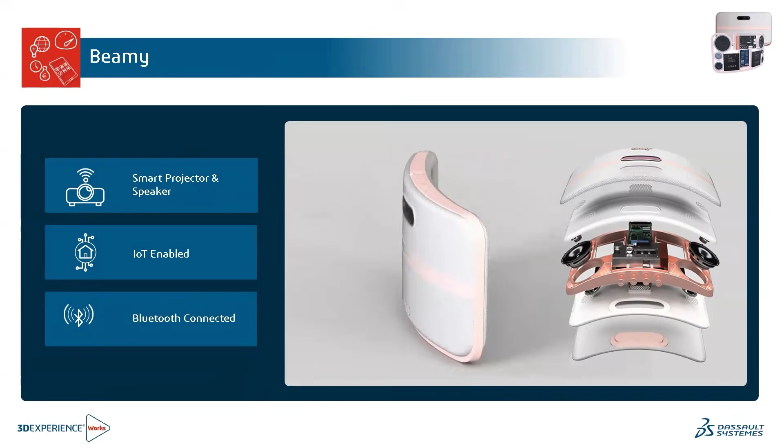Now, to understand how unified modeling and simulation or ModSim can help address these challenges, we're going to take a look at the example of Beamy. Beamy is a smart projector and a speaker. As it is IoT enabled, it can be connected to other devices like smartphone, smart TV, or other smart home appliances. And it primarily consists of an acrylic frame, projector unit, electronic speakers, and batteries.

Now, some of the key performance requirements for typical high-tech devices are: first, it has to be smart and connected. So in case of Beamy, we need to ensure that the Bluetooth antenna is placed at an optimal location for uninterrupted communication, the PCB can transfer high-speed data efficiently, and the device is ready to go through EMI and EMC compliance.

Secondly, as you can see here, there are a lot of small components packed in a tight enclosure, so they can heat up pretty quickly. So we have to ensure that the maximum temperature of these components is within the operating limits. This will ensure that the device operates efficiently and does not overheat, ultimately extending its lifespan and improving overall performance.

Third, the device must be robust enough to withstand any accidental drops or unintended abuse scenarios without compromising its functional or structural integrity. And lastly, the casing is made up of injection molded plastic parts, and we need to identify if there are any potential defects that might occur in the manufacturing process. This will eliminate any expensive and time consuming mold rework later in the production phase.

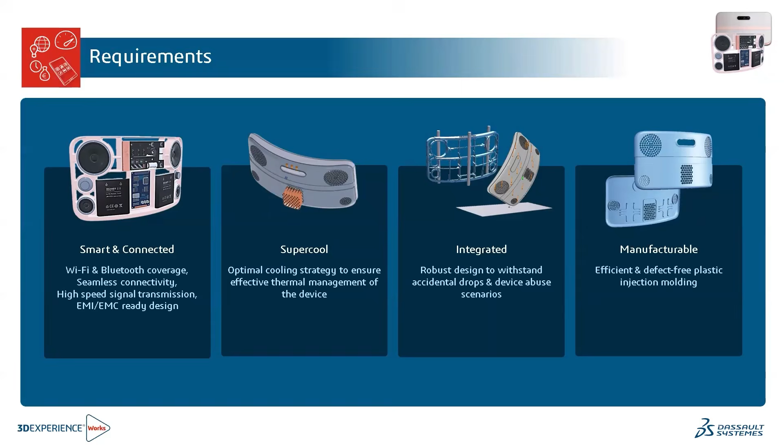So let's talk about ModSim now. But before that, I just quickly want to talk about 3D Experience Works, which is our on-cloud 3D Experience portfolio for SolidWorks customers. Now with 3D Experience Works, you are getting the best of both worlds, meaning that you can use SolidWorks modeling capabilities to design a product, and for advanced multi-physics simulation, you can use the 3D Experience platform to validate the product.

And with the 3D Experience platform, it's not just simulation. The platform is a cloud-based, fully integrated end-to-end solution that brings all the disciplines and stakeholders together, from design, simulation, all the way to manufacturing, governance, marketing, and sales. And today we are going to focus on the synergy between modeling with SolidWorks and simulation with the 3D Experience platform on the cloud.

Now, as you can see here, the 3D Experience platform empowers SolidWorks users to run multi-physics simulations on the cloud across different disciplines, such as structures, fluids, electromagnetics, plastics injection, and even rigid body motion.

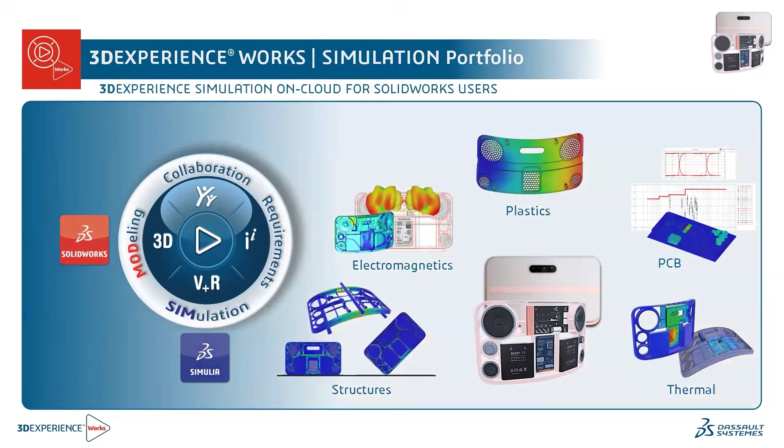So what is ModSim? Traditionally in many companies, design and simulation teams are working in silos, meaning once the design is complete, the designer will throw CAD over the wall to the simulation engineer. And if there is a design change, there is a lot of import and export of CAD data between design and simulation teams. But with ModSim on the 3D Experience platform, we are modeling and simulating in a fully integrated collaborative environment without any loss of data or import or export of various file formats, as in the case of the siloed process or the traditional engineering process.

So let's see how we can use ModSim to assess the performance of Beamy. And as I mentioned earlier, the key requirements for Beamy are it has to be smart and connected, thermally efficient, robust design, and manufacturable plastic casing.

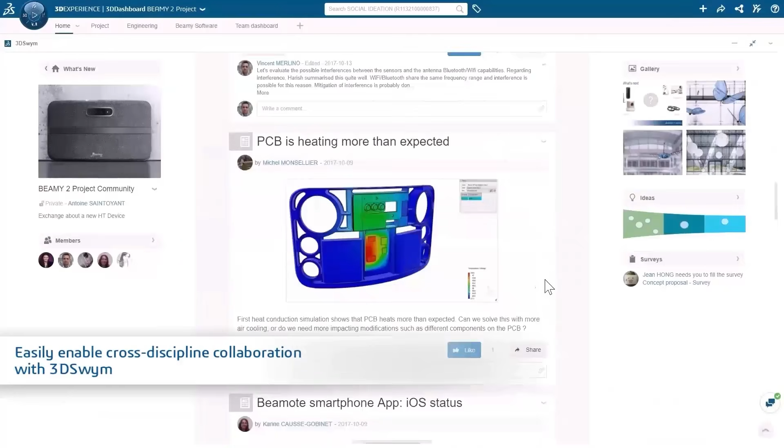Now, collaboration is a key aspect of the platform. And with the 3DEXPERIENCE platform, one can collaborate effectively. So as you can see here, we can create communities to share data with internal and external stakeholders. You can track the project status and also update the task that is assigned to you so that you can inform the appropriate stakeholders on the progress of the task.

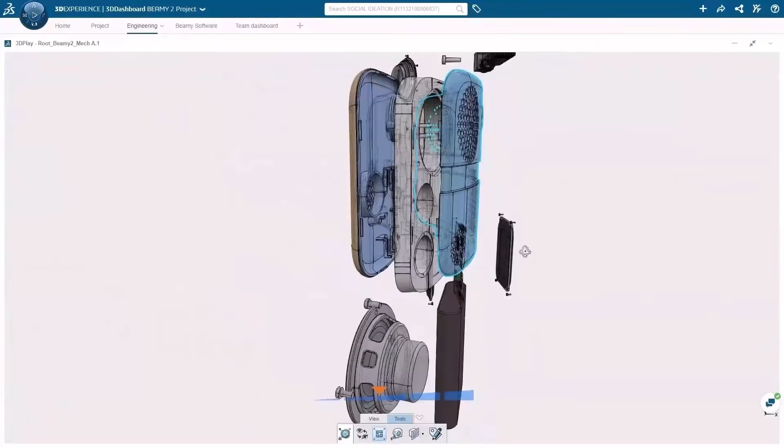And you can also review the 3D models in a lightweight visualization app without opening the native apps or the rich client. Now let's see how we can assess the multidisciplinary performance of Beamy in the 3DEXPERIENCE platform.

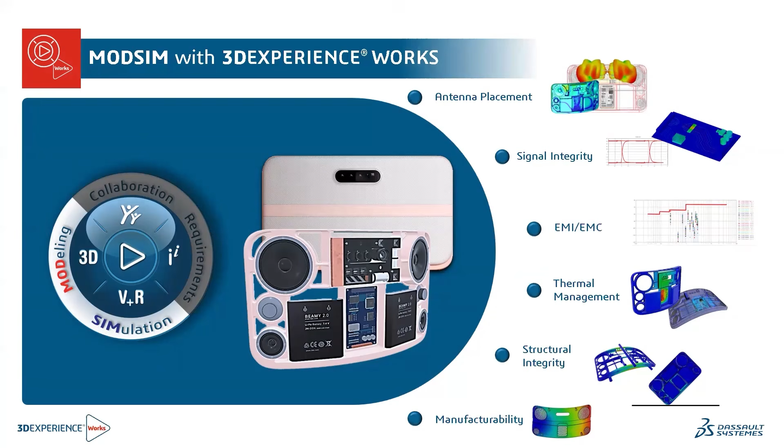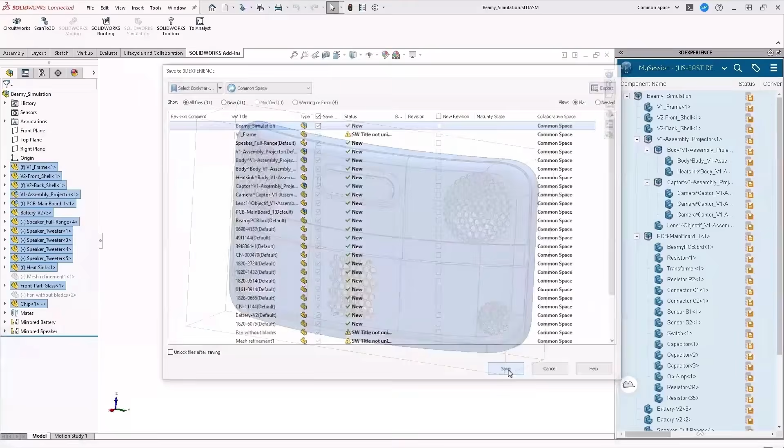Now the first and foremost step is to save the SolidWorks CAD onto the 3DEXPERIENCE platform. Now in this case here, we have the plugin or the add-in for the SolidWorks user. So within the SolidWorks interface, you can save the model on the platform. And once the model is saved, you can use the appropriate simulation role to set up the simulation. So here we are saving the model and we can quickly check the save status.

And once the model is fully saved on the platform, anybody can access this model from anywhere and on any device. And here we are launching the structural model creation app to set up the structural scenario on the platform. So as you can see from the SolidWorks interface, we seamlessly switched onto the platform to set up the structural simulation. So there was no import or export of CAD files or a dumb CAD to set up the simulation.

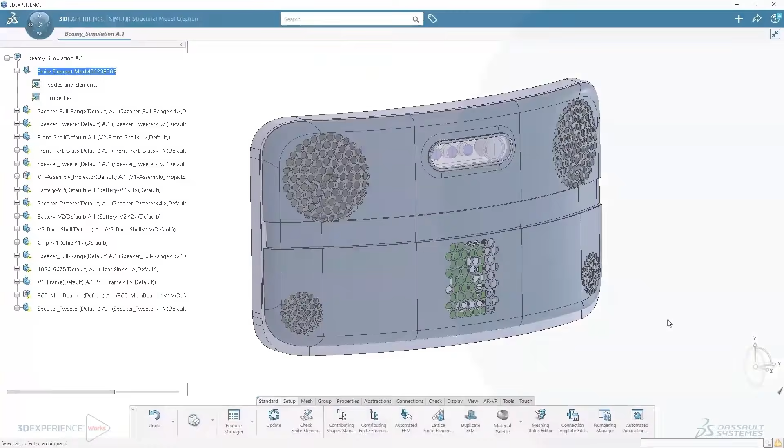Now let's see how we can assess the electromagnetic performance of Beamy. Now, one of the main challenges for electronic devices is that they need reliable connectivity in order to function properly. Without a strong and consistent connection, these devices may not be able to perform their intended task effectively. Now, one effective solution to this problem is optimal antenna placement. By placing the antenna at an optimal location, we can ensure that the device has the best coverage and signal strength, and it will provide a more stable and reliable connection.

Now, in case of Beamy, the KPIs are the scattering parameter or the S11 parameter should be less than minus 10 decibels, meaning that less than 10% of the signal is reflected and over 90% of the power is radiated or transmitted efficiently. Center frequency should be 2.45 gigahertz. So this is the standard Bluetooth operating frequency.

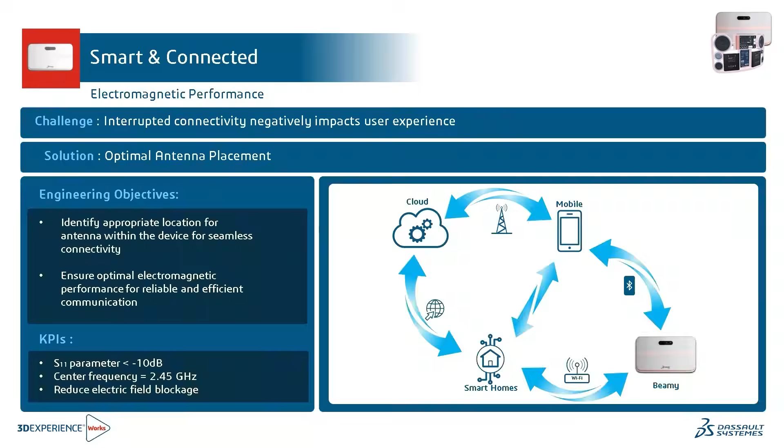And electrical field blockage should be minimal. So basically minimize any objects or material that could block the antenna's radiation path, as any obstruction causes reflection or absorption, leading to electromagnetic field distortion or localized hotspots, and that may result in failing the EMC emission test. So let's see how the electromagnetics engineer role can enable the optimal antenna placement.

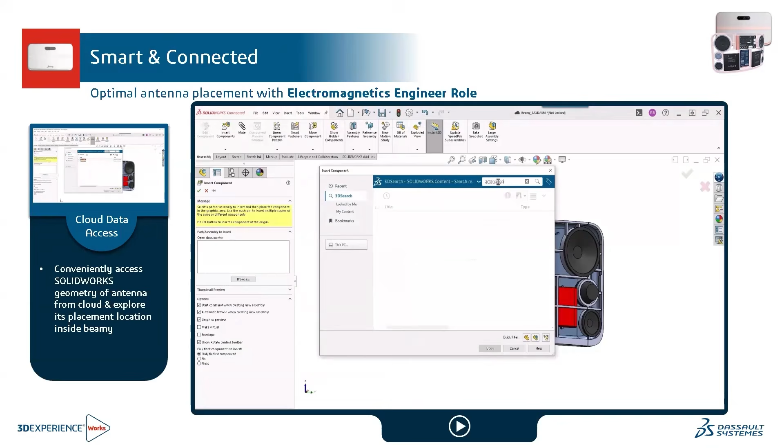So here, the first step, as I mentioned earlier, is to save the model. But before that, we are just inserting the antenna design into our Beamy model. Since there are different antenna CAD models already saved on the platform, we are just searching in the database and inserting the antenna in our existing CAD. So once we are happy with the antenna location, the next step is we are going to save the model on the platform. So here we have placed the antenna inside the Beamy. Now the next step is to save the model on the platform.

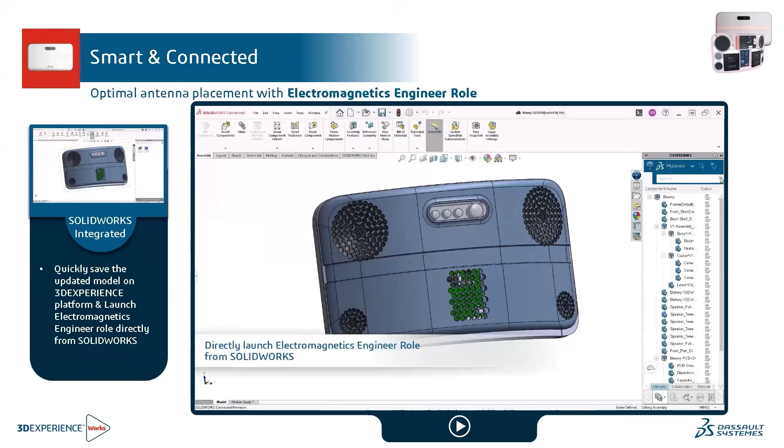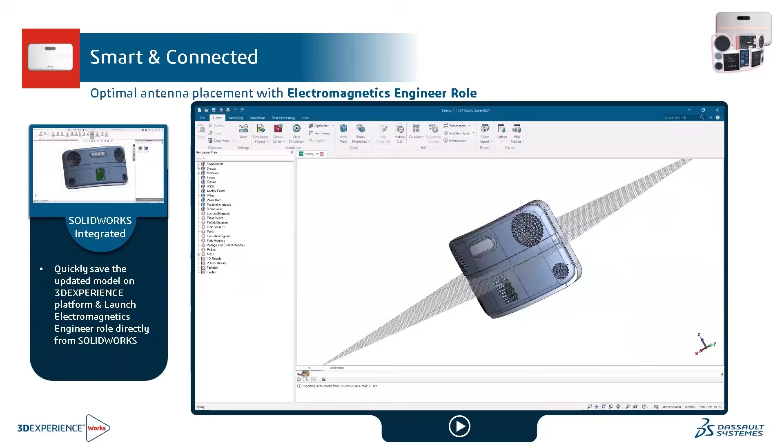So again, as I mentioned earlier, we are using this 3DEXPERIENCE add-in, which is available for the SolidWorks users to save the model. And once the model is saved, we are launching the electromagnetics engineer role to set up our EMC simulation. So as you can see, again, we seamlessly switched from the SolidWorks interface to the CST Studio Suite to set up our EMC simulation.

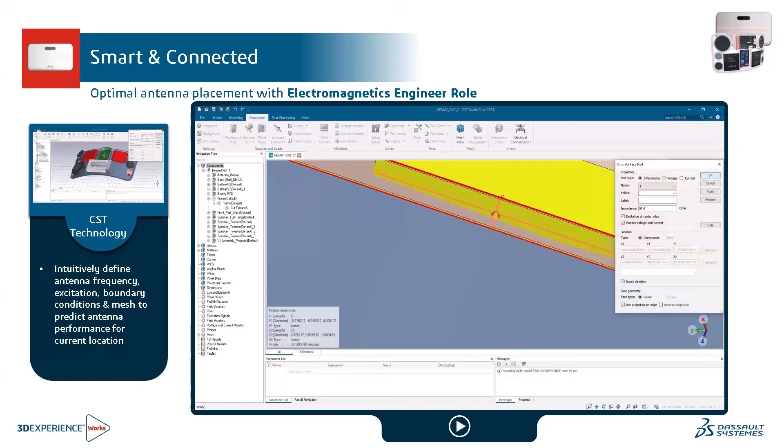Now here, once the model is open in the CST Studio Suite, we are going to define the frequency range, boundary conditions, and the excitations. Also, we have the automatic meshing capabilities to mesh the model as well. So here we are defining the time domain simulation, and we define the frequency range and the boundary conditions.

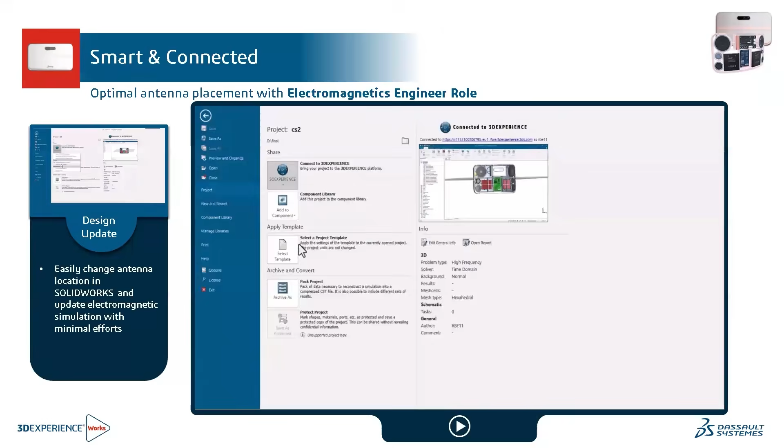Now let's say you run the simulation and you want to make a design change. Now here what we are doing is we are placing the antenna at a different location, because we want to analyze the electromagnetic field distribution. Once you update the design, all we have to do in the CST Studio Suite is to check for the CAD update. And once you update the CAD in the CST Studio Suite, all the frequency range, boundary conditions, loading that we have defined earlier will remain as is. We don't have to redefine this or define the scenario setup again. All we have to do is simply rerun the simulation for the new CAD design.

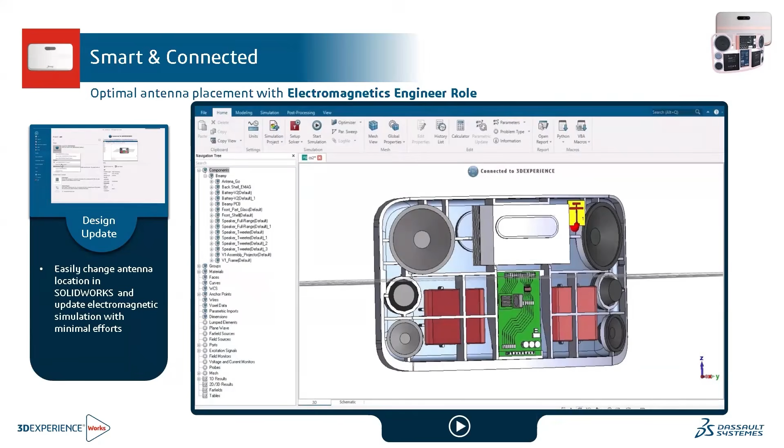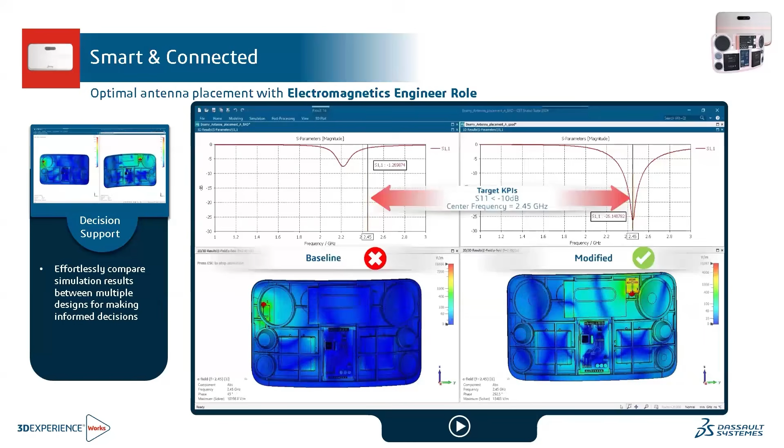So here we ran the simulation for two different antenna locations. And for the new antenna location, the scattering parameter and the center frequencies are meeting the KPIs. And also the modified design has better electromagnetic field distribution as compared to the baseline.

Now the manufacturers also need to ensure that the device passes the electromagnetic compatibility specified by the regulatory standards. EMC is typically very expensive and time consuming. And with electromagnetic simulations, OEMs can virtually validate if the device is ready to go through EMC and potentially pass the very first time.

Now, in our case, we need to ensure that radiated emissions from Beamy should be within the specified FCC limit. And to measure the signal quality, we will use the eye diagram parameters. So the KPIs here again is that eye height should be greater than 1.32 volts. So higher this number, better is the noise immunity. And eye width should be greater than 0.63 nanoseconds. So this is the time window during which the signal is stable and correctly interpreted as 0 or 1.

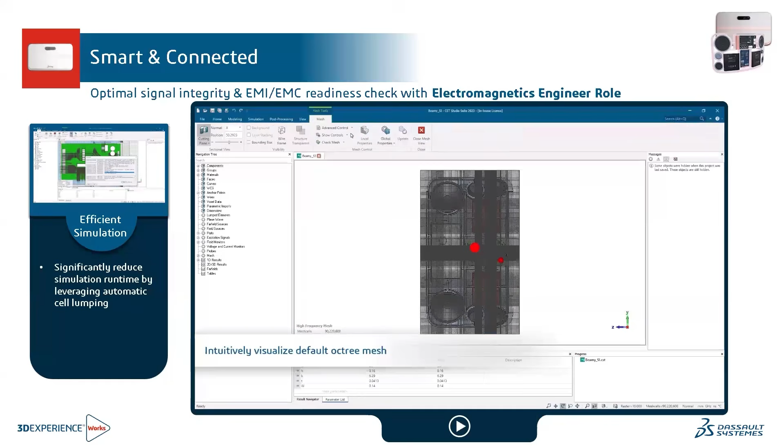So we are again going to use the same electromagnetics engineer role to assess the EMC compliance. Now, in the CST Studio Suite, we have something called the automatic cell lumping technology. What it does is that in the area of interest, it uses a highly refined mesh, and away from the area of interest, it uses the large macro cells and the reduced integration elements to reduce the mesh count. Now, this not only reduces the mesh count, but also reduces the memory requirement without compromising the simulation accuracy.

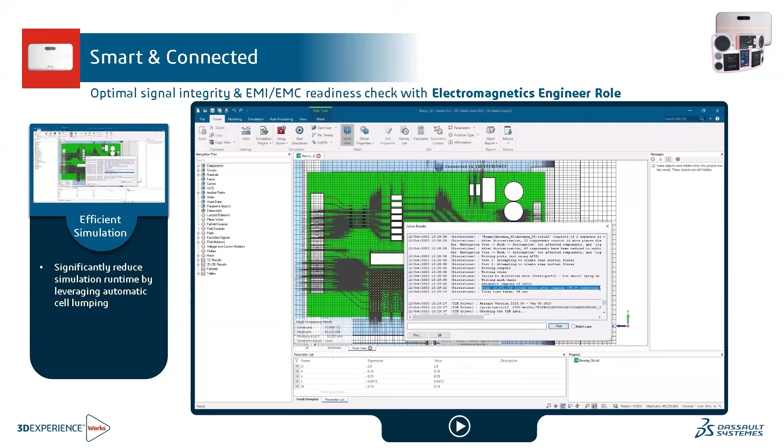Now here we are just showing the ease of use of the tool. We are defining the multiple excitations in one go within a single dialog box. So here we are just selecting the multiple ports. And once we select that, we can apply the excitations in the same user interface.

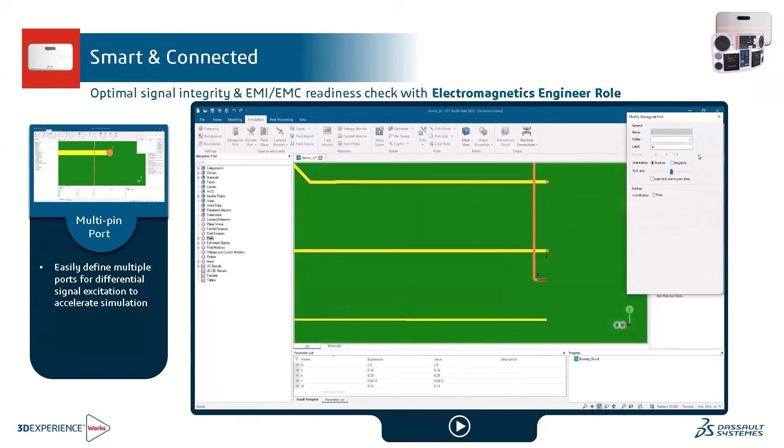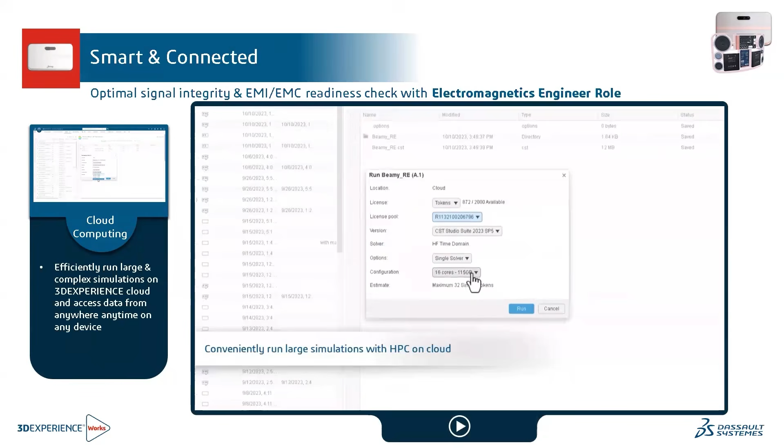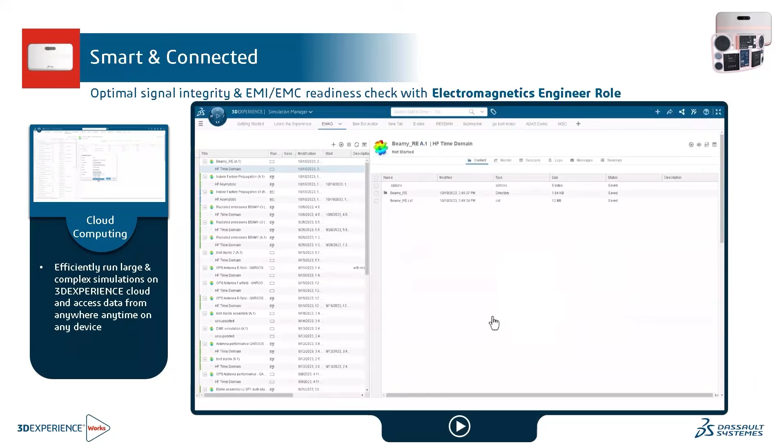And the electromagnetics engineer role has 16 cores of embedded compute, meaning that up to 16 cores, you do not need any license or tokens to run the simulation. And you can run these simulations either locally or on the cloud. In fact, on the cloud, we have the option to run the simulations using CPU or GPU to reduce the simulation turnaround time.

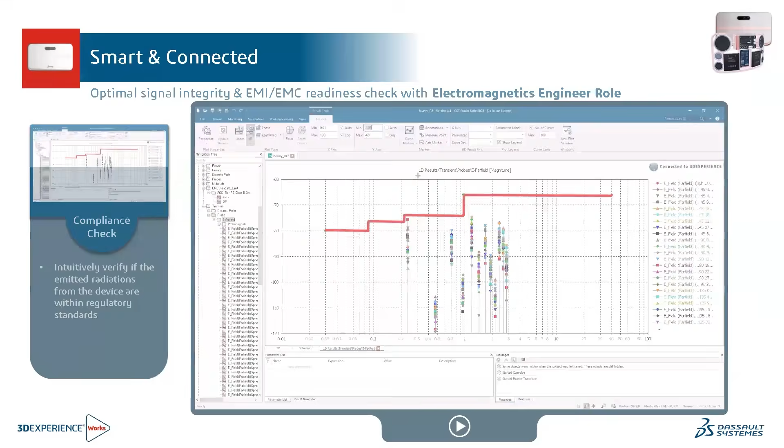Also, we have EMC standard libraries. So here, what we are doing is we are plotting the FCC limit line, and we are making sure that the emissions are within the compliance. So in this case, as you can see, the radiated emissions from Beamy are within the FCC limit. So to summarize, using the electromagnetics engineer role on the 3D Experience platform will enable you to effectively design, analyze, and optimize electromagnetic components and systems.

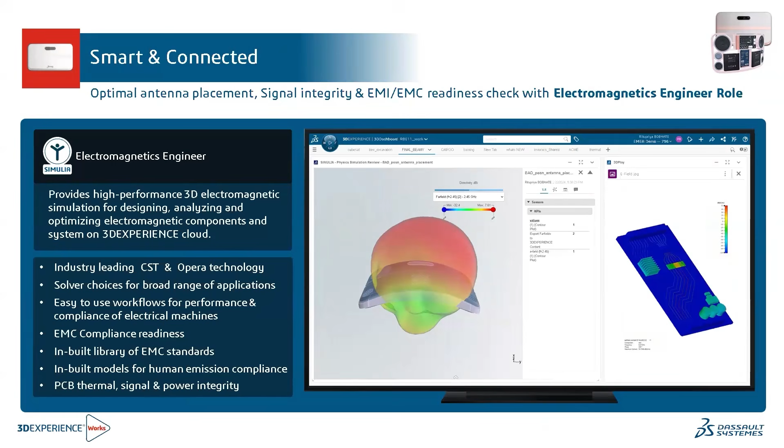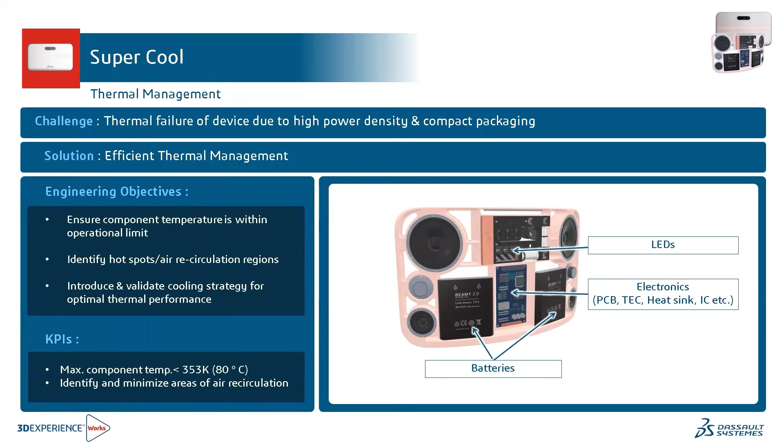Now, next, let's assess the thermal performance of Beamy. Now, as I mentioned earlier, there are a lot of components packed in a tight enclosure, and they can heat up or dissipate heat when they are powered up. Now, in the case of Beamy, as you can see, we have multiple components that dissipate heat, such as PCBs, batteries, projectors, and many more. So the KPI here is that the maximum temperature should be within the operating limit and minimize any air recirculation inside Beamy. So now to assess the thermal performance, we are going to use the fluid dynamics engineer role on the platform.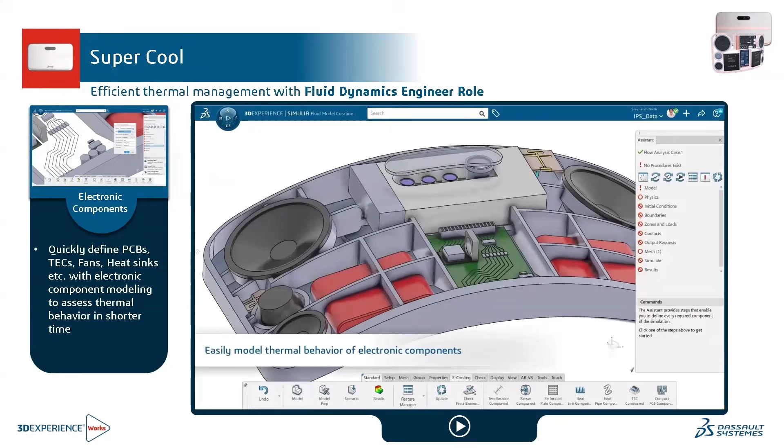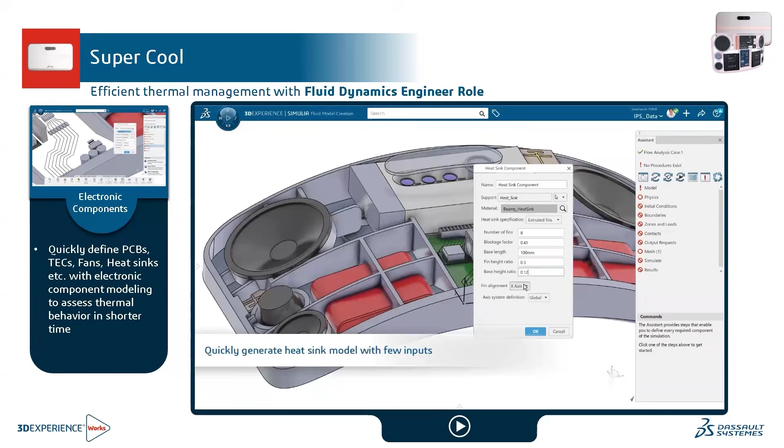Now, one nice feature of the fluid dynamics engineer role is that in order to perform thermal simulation, detailed CAD is not necessary for electronic component models. We can use the abstract models that are available in this role to define the thermal behavior. So here we are defining the heat sink with just a couple of inputs. And then we are using something called the two resistor model to simplify the thermal behavior of a chip. So all we have to define is the two thermal resistances, basically heat flow from the chip core to the case and from the chip core to the board.

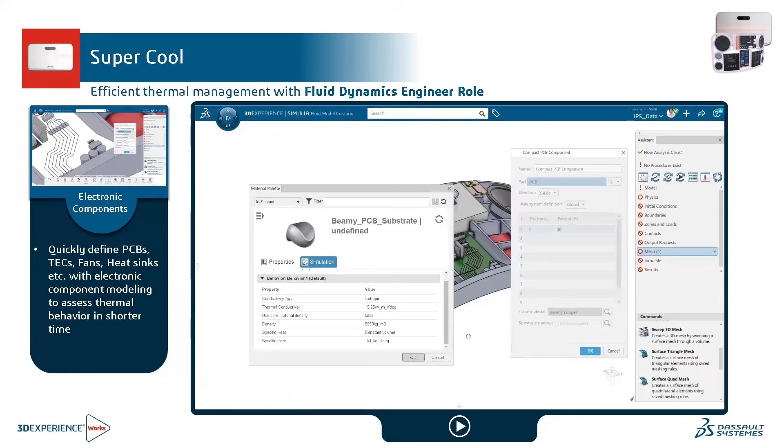Then we are using the PCB component model. So we are defining the trace material, substrate material, and the corresponding thicknesses. Again, if you have previously done a similar simulation, then you can simply search for the material in the 3DEXPERIENCE database, and you can reuse that material for this particular simulation. So as and when you are creating materials, you are actually creating the material database that anybody can use in the organization to perform simulation.

And here again, we are using a thermoelectric cooler component. It's a semiconductor device which, when powered, creates a temperature difference between the opposite sides of the device. And that's why we define the cold side and the hot side.

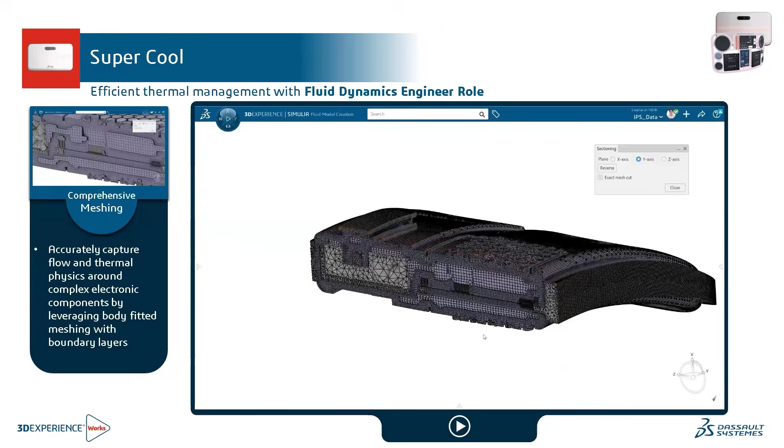Also, when you're performing fluid simulation on the platform, we do not need a CAD for the fluid domain. The solver automatically extracts the fluid domain and uses a body-fitted boundary layer meshing technique to mesh the air domain. And as you can see here, we have meshed the solid as well as the fluid because this is a conjugate heat transfer simulation where there is heat transfer between the solid and the surrounding air. And that's why we used hex mesh and tet mesh to mesh all the electronic components here.

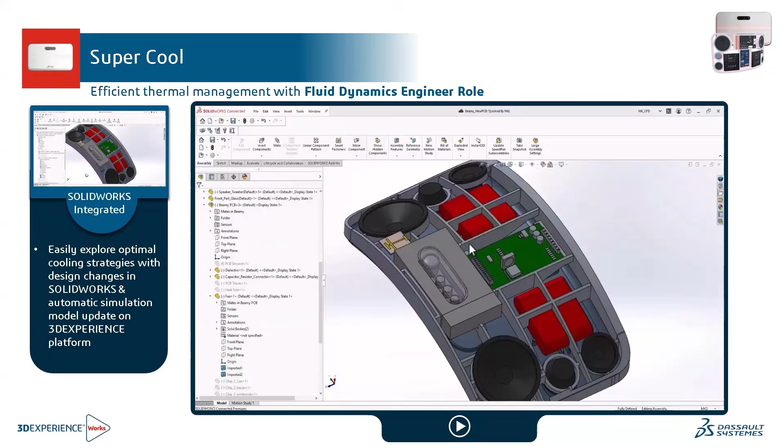Now again, let's say if you want to make a design change or modify the geometry, we are going to make that change in SOLIDWORKS. So we are adding a fan next to a chip. Once you make that design change, the first step is to save the updated model on the platform. And once the save is successful, all you have to do is go back to your simulation that you have previously set up.

So here we are in the 3DEXPERIENCE platform, and we are simply doing the global refresh to look for any CAD changes. Once you refresh the geometry, it will automatically pick up that there is a design change, and it will insert the CAD model of a fan. Now all we need to do is define the fan model using the different abstract models that we have in the Fluid Dynamics Engineer role, and simply update the model. It will automatically update the mesh and rerun the simulation to get the new results.

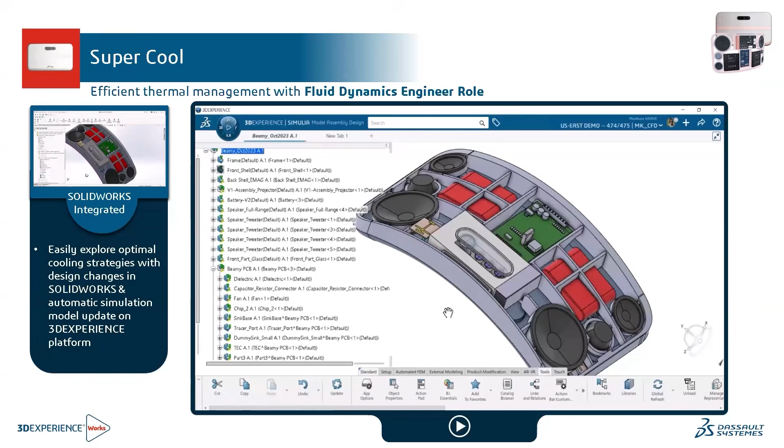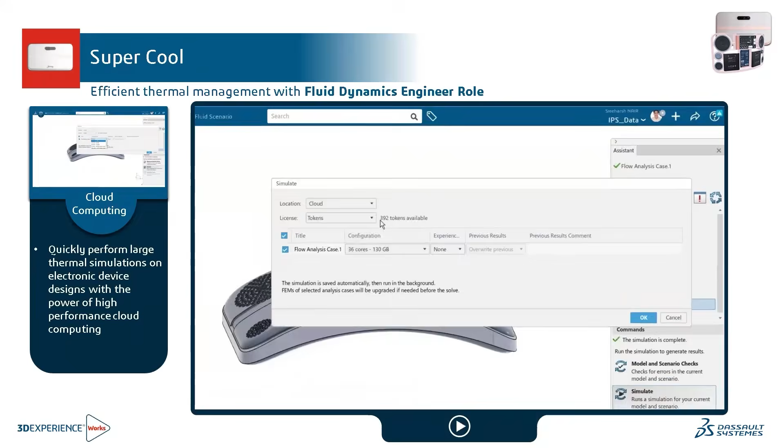And again, the fluid simulation can be compute intensive because of the large mesh count. In that case, you can use the DS cloud infrastructure, and you can run these simulations all the way up to 144 cores to get quick results.

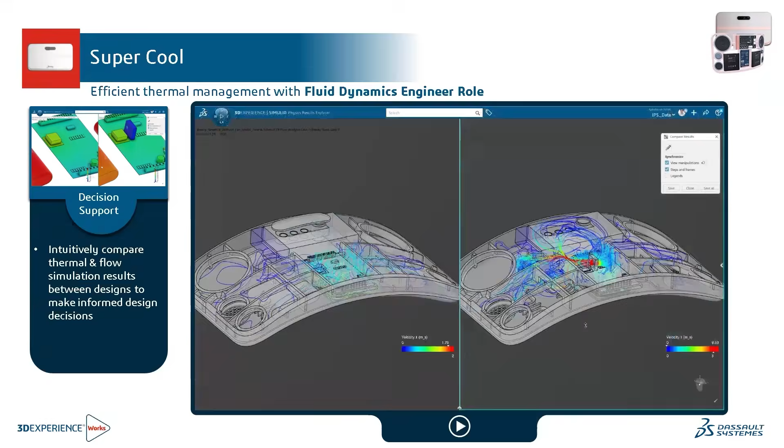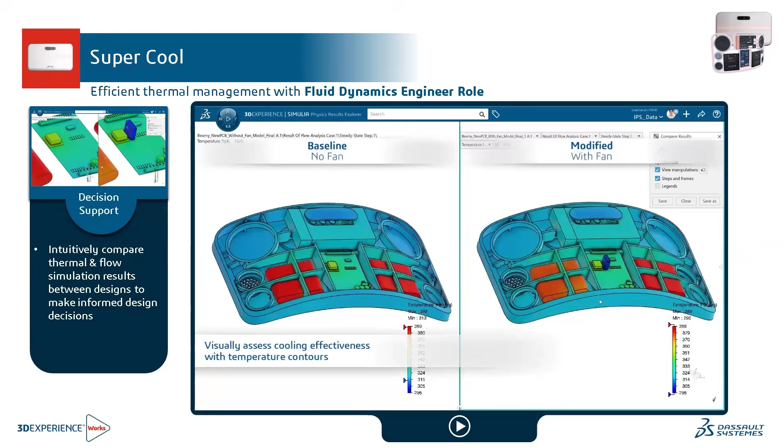And here we are comparing the results across the different load cases. So we are comparing the results of the model with fan and one without fan. We can check the air recirculation areas, so we can plot the velocity streamlines. You can look at the temperature contour plot. You can play the animation. You can create the reports. And here again, we are just comparing the results side by side between the two designs. In this case, the design where we have the fan added, we can see that the maximum temperature is within the operating limits.

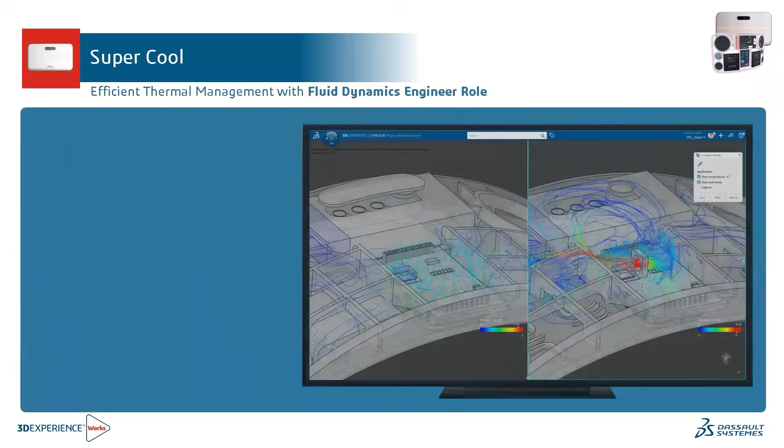So in summary, using the Fluid Dynamics Engineer role, we can assess the flow and thermal behavior of the product and make more informed engineering decisions. Now next, we are going to see how we can assess the structural integrity on the 3DEXPERIENCE platform.

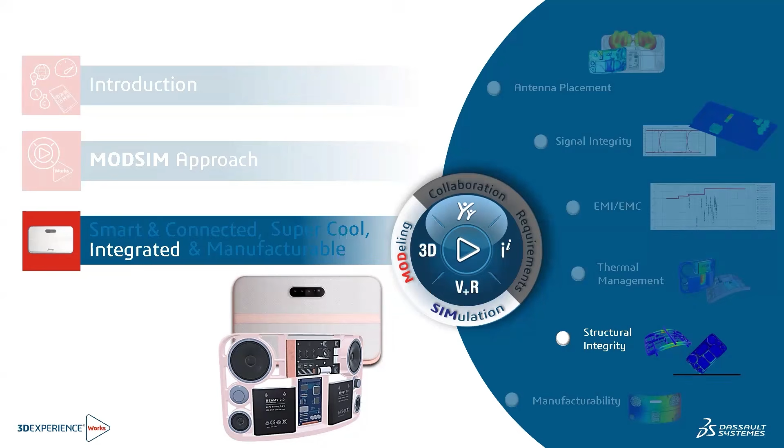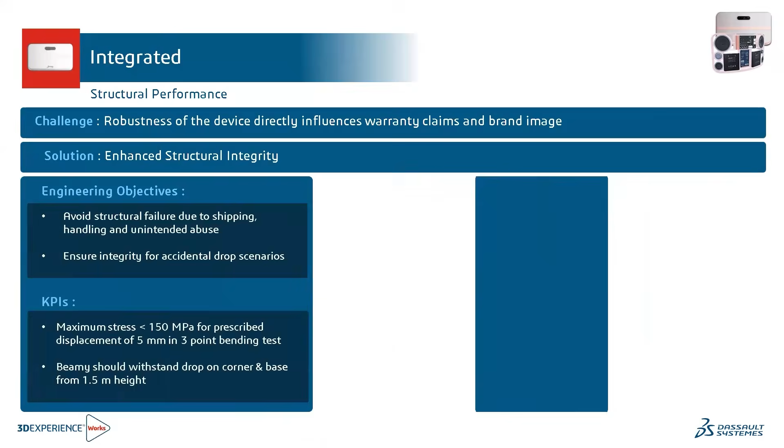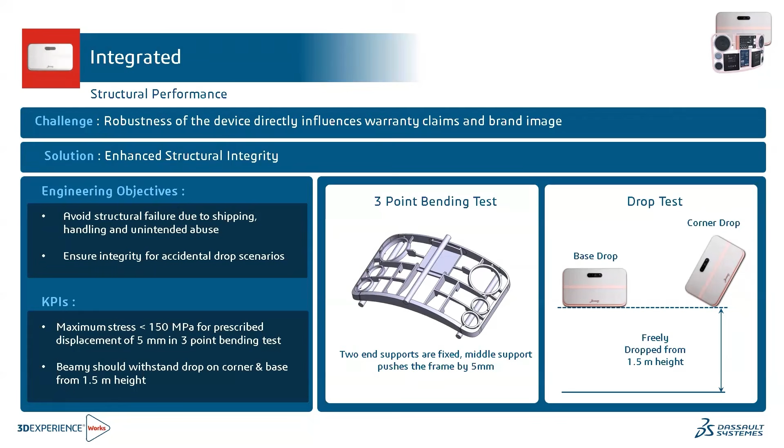Now, structural robustness significantly impacts warranty claims and brand image for high-tech devices. In case of Beamy, the KPIs are: the frame should withstand a targeted bending displacement of 5 millimeters, and maximum stress induced should not exceed 150 megapascal. Also, the device should withstand corner and base drops from a height of 1.5 meters.

Now, first, we are going to look at the Structural Designer role available on the platform, which allows us to perform linear structural simulations. One of the nice features of the platform is that it comes with something called the assistant panel. Think of this as a guided workflow. All you have to do is start from the top, and by the time you reach the end of that assistant panel, you will have a simulation ready to run.

It basically tells you what steps are mandatory, which steps are optional, and what are some of the key inputs that you are missing for that particular simulation. So this is really useful for new designers or somebody who is new to the platform. It will help you to set up the simulations quickly.

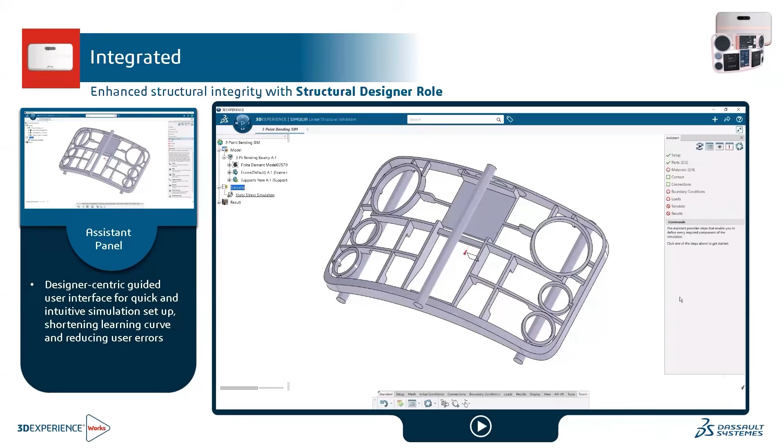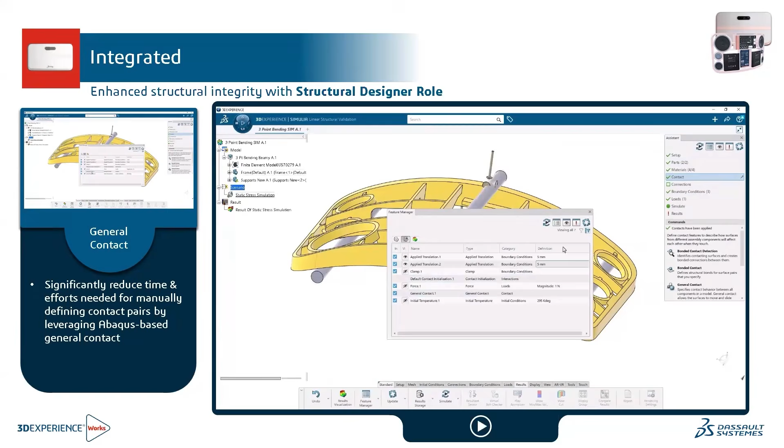Now, as you may know, simulation on the platform uses the Abaqus solver technology behind it, and Abaqus is widely popular for its nonlinear capabilities. Meaning, if you have a nonlinear material, nonlinear contact, or large deformation, the Abaqus solver is robust enough to give you a solution.

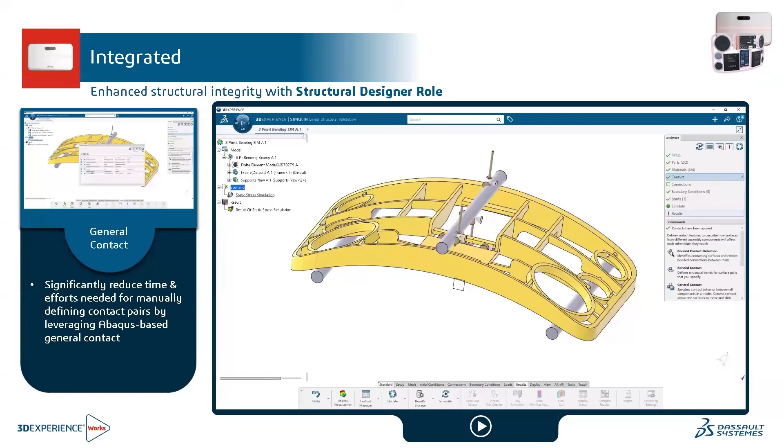Now, in this case, we are using something called general contact. What it does is that it encompasses the entire model. If you have any surface or edge-to-surface contact that may occur during the simulation, the solver will recognize that contact. So we do not have to explicitly define each and every contact pair in this case. With just one contact pair, the solver will take care of the contacts that may occur during the simulation.

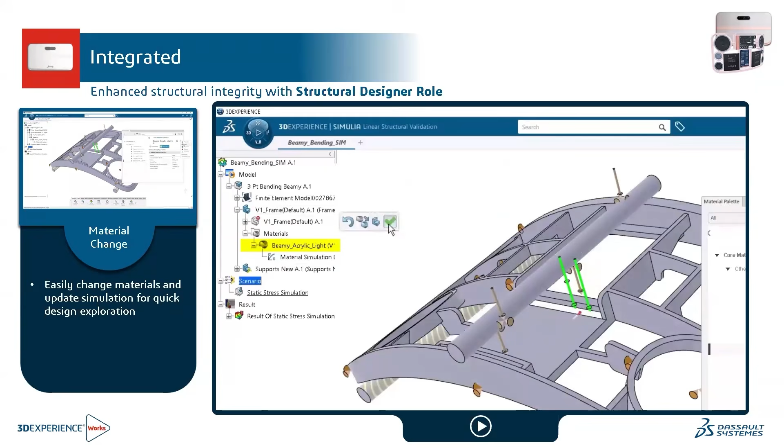And again, if you want to do any quick design exploration, let's say you want to run a simulation by changing the material, you can again look up the new material in the database and you can overwrite the previous material. And when you are running the new simulation, you have the option to either overwrite the results or keep the previous results. So if we keep the previous results when running a simulation, you can compare the results between the old design and the new design.

So here we ran the simulation with two different materials. And as you can see with the new material, it is meeting the KPIs where the maximum stresses are less than 150 megapascal.

Now next, we are going to use the structural mechanics engineer role. Now here we are using a different role to set up the non-linear explicit impact simulation. Now structural mechanics engineer role, you can think of this as Abaqus on the platform. It has all the Abaqus capabilities and functionalities.

So if you want to perform, let's say, non-linear structural implicit or explicit simulations, you can use structural mechanics engineer role. And it comes with 8 cores of embedded compute. So again, if you want to run simulation locally or on the cloud up to 8 cores, you do not need any licenses or tokens to run the simulation.

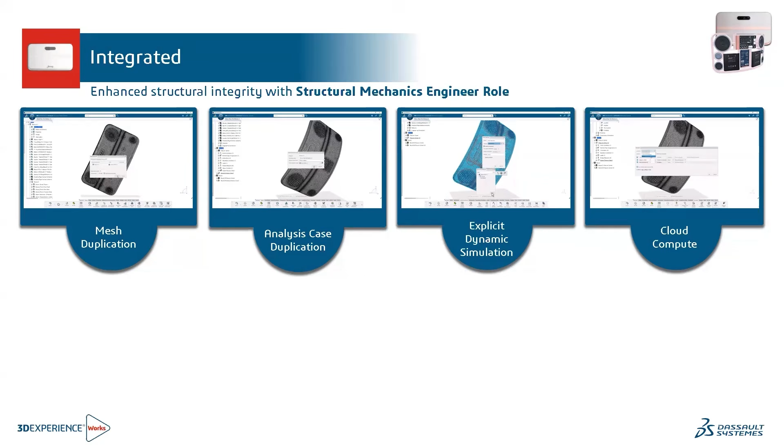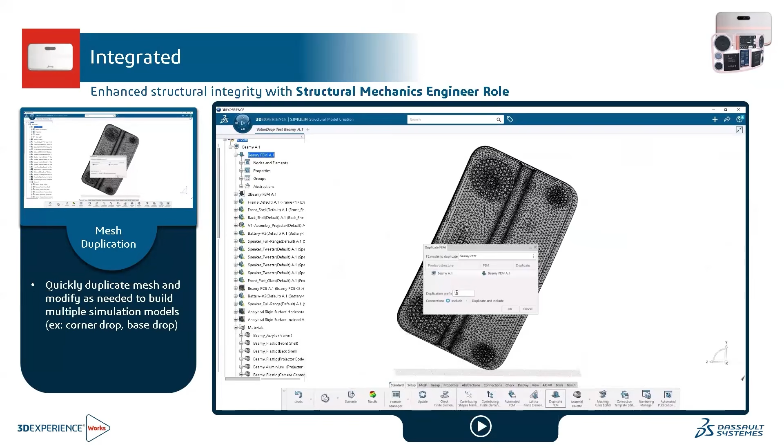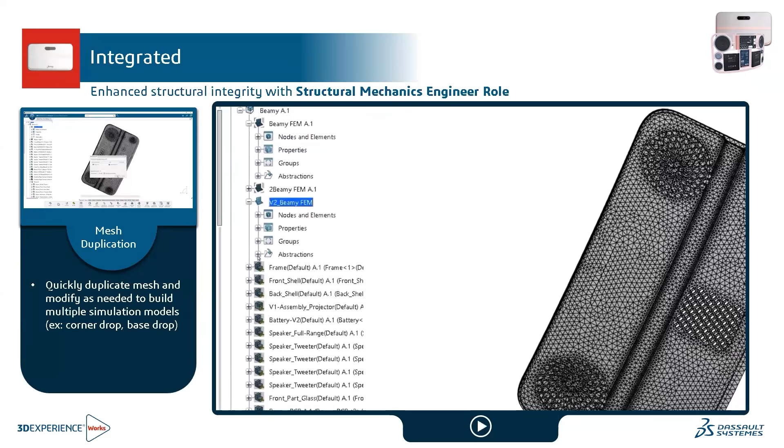So here, as we discussed earlier, we are going to perform corner drop as well as the base drop. In both the cases, the only difference is the orientation of Beamy. So rather than creating the drop case for a different scenario, what we are doing is that we are simply duplicating the mesh. And when we duplicate the mesh, all the properties, group definitions, abstractions get automatically duplicated. So in the duplicated case, all we have to do is either change the orientation of Beamy or change the ground orientation and just run the simulation again.

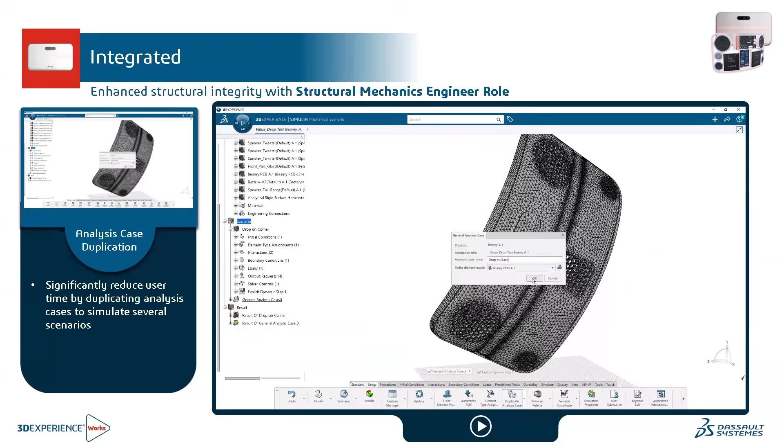And same goes with the analysis case. Since we have already created the drop case for a corner drop, we are duplicating the analysis case. So when we duplicate the analysis case, again, all the initial conditions, interactions, boundary conditions, loads, if you have defined any specific output request, they all get duplicated. So we don't have to recreate the analysis case again.

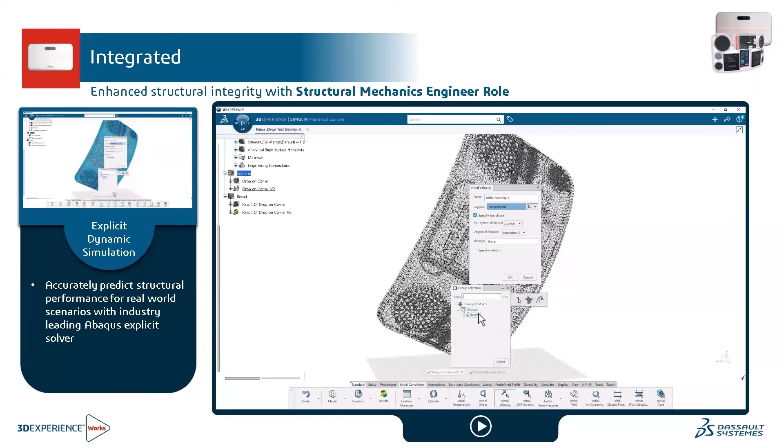And here, as I mentioned earlier, we are using Abaqus explicit dynamic solver to set up the simulation. So here we are defining the impact duration. Then we are going to define the initial velocity. So depending on the drop height, the initial impact velocity is going to change. So here we are defining the velocity in the negative y direction.

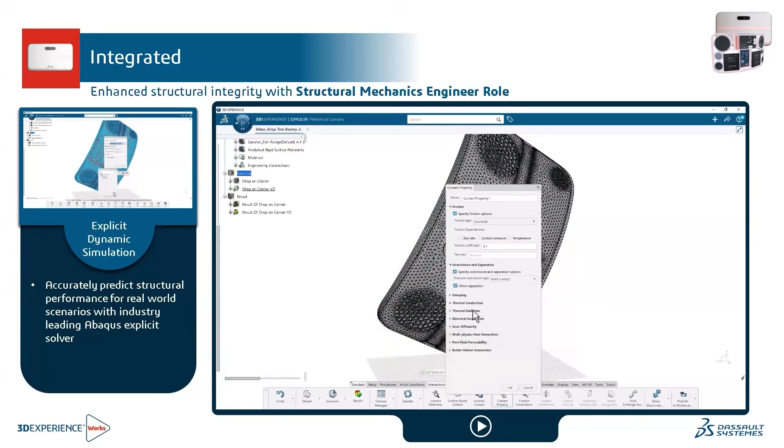Then the next step is the contact. So we can use the general contact definition and we can define the friction properties. Again, we have the flexibility to define specific contact pair friction properties also. So if you want to define a different contact friction coefficient for another contact pair, you can do that.

And then here we are fixing the ground. Since the ground is modeled as a rigid body, we are selecting the reference point of that rigid body and we are fixing it in all the 6 degrees of freedom. And lastly, we are just defining the gravity in the negative y direction. And with that, we have defined the scenario and we can run this simulation locally or on the cloud.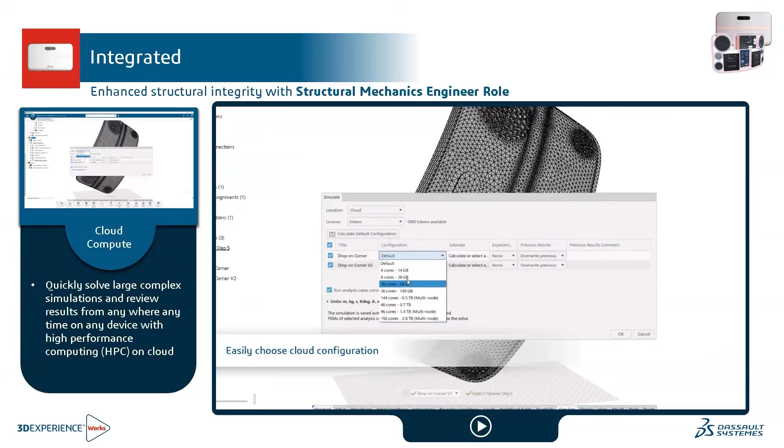So as I mentioned earlier, again, structural or fluid simulations can be very compute intensive. Structural simulation, if it is highly nonlinear, where you have, let's say, a continuous change in contact or large deformation, can take a long time to run. So here again, we can run these simulations on the cloud.

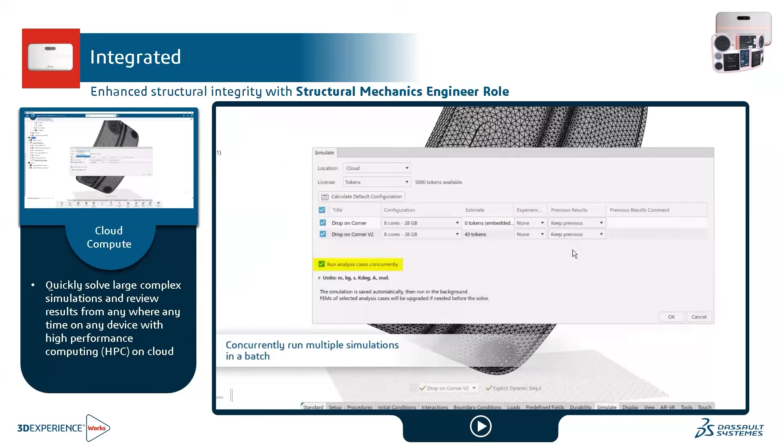As far as structural simulation goes, we can run the simulations on the cloud all the way up to 192 cores. And we have the flexibility to run the simulations sequentially or concurrently. When you run the simulations concurrently, the second simulation will require tokens. But let's say if you decide to run the corner drop and the base drop load cases sequentially, up to 8 cores, you do not need any tokens to run this simulation.

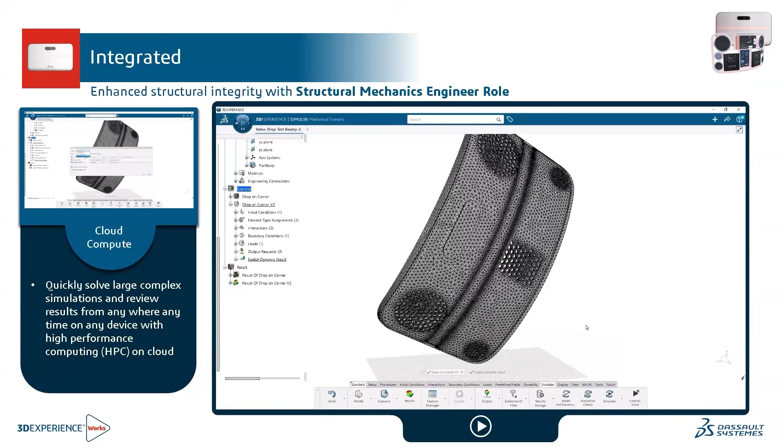So as you can see here, for our SolidWorks users, we have these two different roles available on the platform to perform structural simulations. If you are interested only in linear static simulations, you can use structural designer role. But if you want to use highly nonlinear implicit or explicit simulations, you can use the structural mechanics engineer role on the platform.

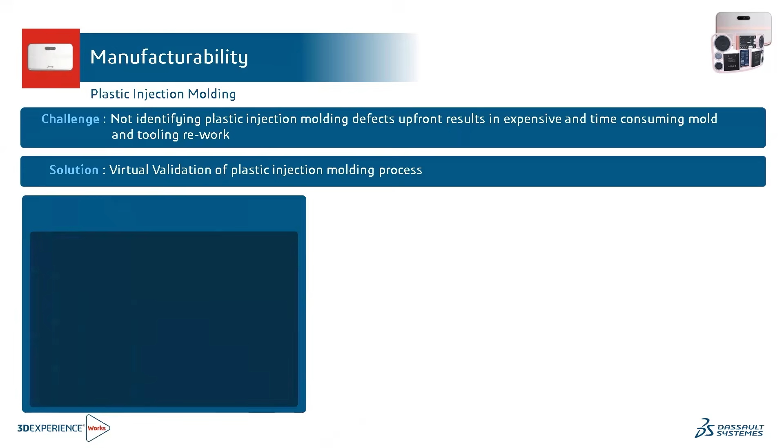Now, lastly, we are going to assess the manufacturability of the product. Now, by simulating the injection molding process, designers can identify potential issues early on and can make informed decisions to ensure manufacturability and prevent any expensive and time consuming mold rework downstream.

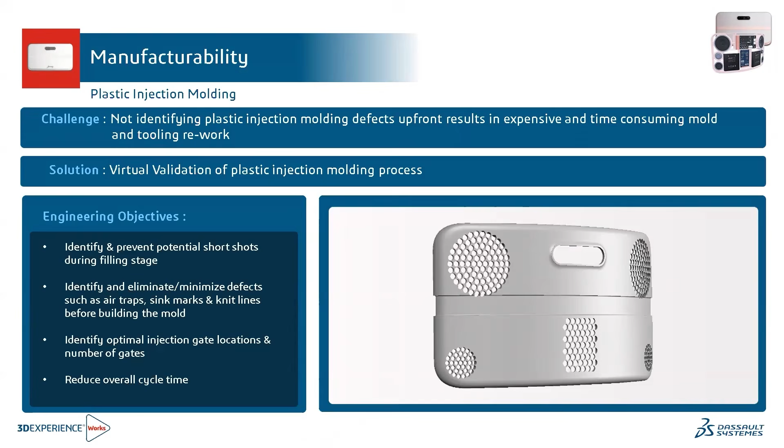So by simulating the manufacturing process, we can look at these different defects such as sink marks, weld lines, air trap, etc.

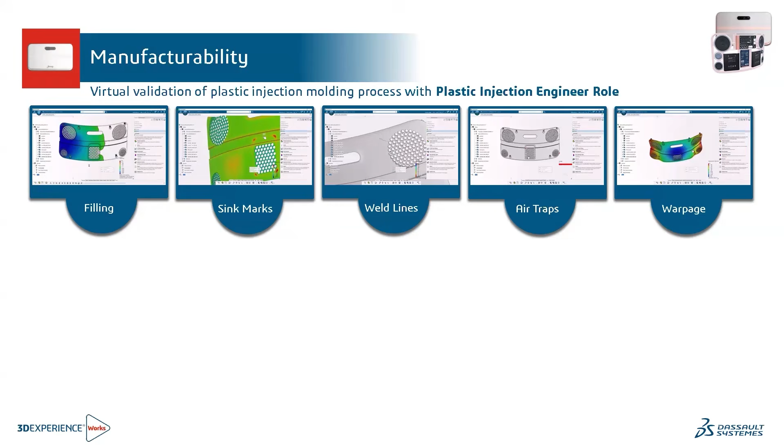So here we have simulated the molding process and we are looking at the fill time, which is nothing but the time required to fill the mold cavity. We can also look at something called ease of fill.

It displays the relative pressure required to fill each region of the cavity. For example, the green region can be filled with pressure below 80% of the maximum injection pressure. Yellow region requires a slightly higher injection pressure. And the red region is where it requires pressure that exceeds 90% of the maximum injection pressure. So in this case, all these protrusions here at the center require maximum injection pressure to fill that cavity.

We can also analyze sink marks, which are defects that occur because of the shrinkage of the material, and they appear as a shallow depression or dimple on the surface of the part. The solver analyzes the geometric features that are likely to induce sink marks, such as ribs, bosses, gussets, and fillets, and it calculates the location and depth of the sink marks.

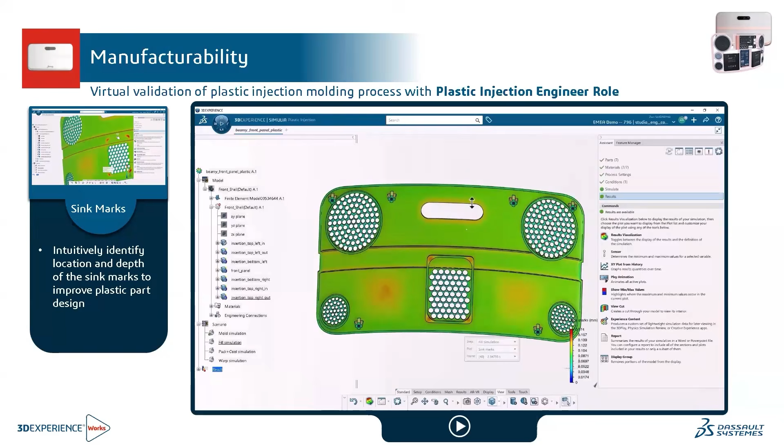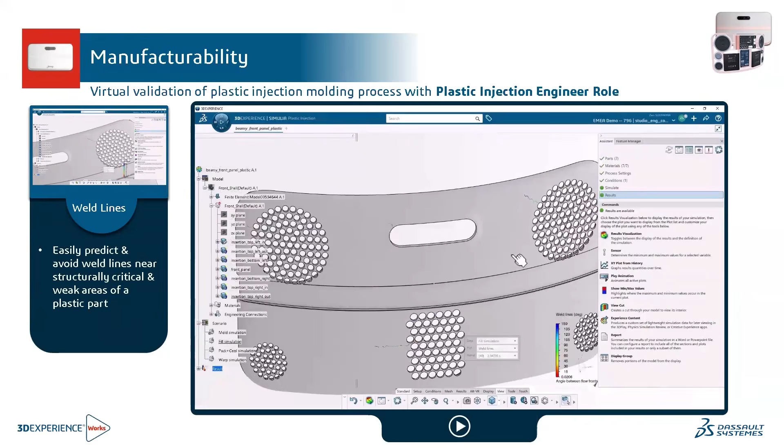We can also visualize the weld lines, which typically occur when the flow front meets during the filling process, and this can potentially form a weld line defect. The mold designer or part designer has to ensure that there are no weld lines near the structurally critical or weak areas of the plastic part. In that case, they might have to add more gates or increase the injection pressure to see if that changes the results.

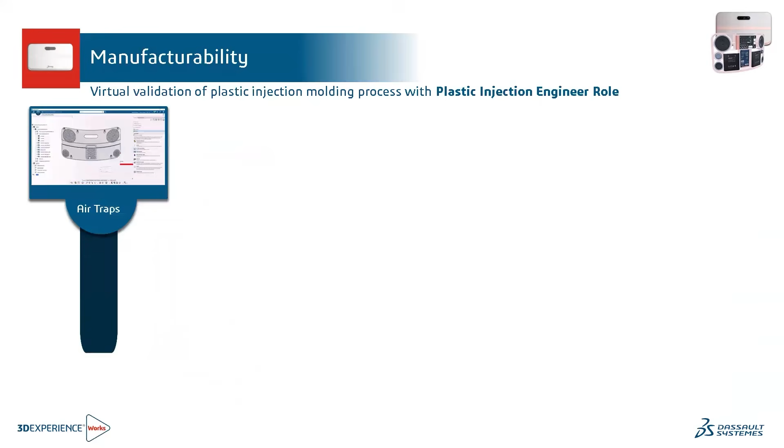We can also look at the air pockets that may develop during the filling process, and in that case, we might require the addition of vents to get rid of the air pockets. So by simulating this injection molding process, we can visually check for the air traps to prevent defects or imperfections that may lead to structural or functional failures.

And lastly, we can also simulate the warping. Typically after the molding process, there might be some residual stresses in the part, and when we take the part out of the mold, because of these residual stresses, there could be warpage in the part. The mold design engineer has to make sure that the warpage is within tolerance and is not significant enough to cause any assembly defects. In order to simulate this warping, we can use the Abaqus solver to calculate it.

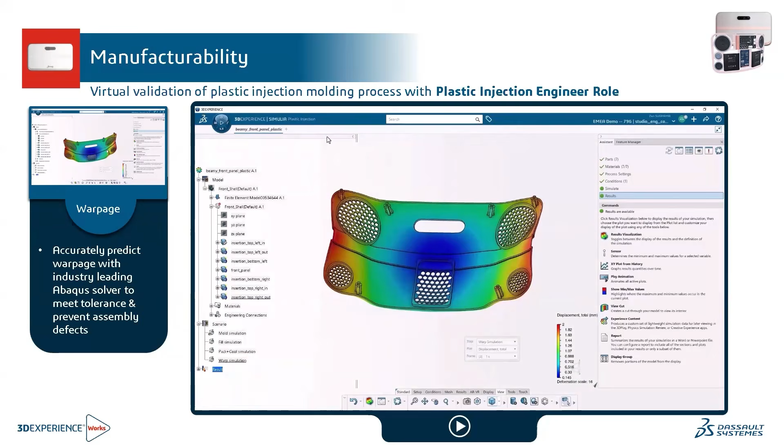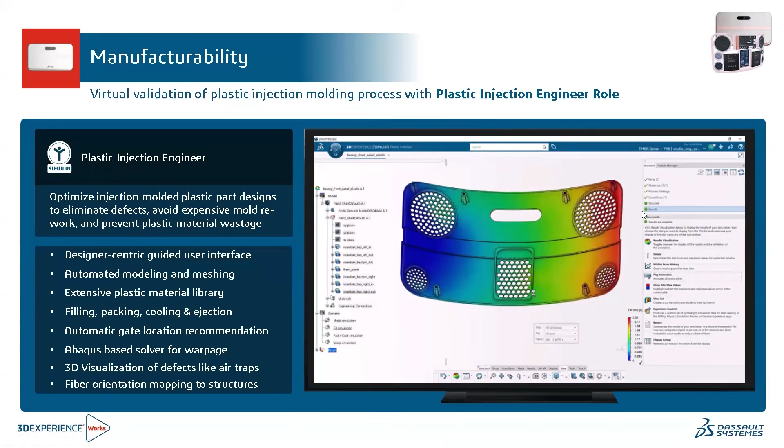With the plastic injection engineer role, part designers as well as mold tooling engineers can validate and optimize injection molded part designs. As you can see here, within this single user interface, we were able to assess the multidisciplinary performance of Beamy.

So what are some of the benefits of modeling with SolidWorks and simulating with the 3D Experience platform? First of all, the platform is fully integrated with SolidWorks. Apart from unified modeling and simulation, the platform provides digital continuity across the product lifecycle, starting from the requirements. Also, the platform is very design centric.

As we saw, we have this assistant panel, which allows designers or non-expert simulation users to set up the simulation effectively on the platform, reducing your learning curve drastically. Also, we have multidisciplinary capabilities available within a single user interface. Whether you want to perform structures, fluids, EMAG, motion, or plastics, we have all the capabilities available on the 3D Experience platform, fully integrated with SolidWorks.

Also, some of these simulations, such as fluids, structures, or even EMAG, can be very compute intensive. And even if you don't have local infrastructure to run the simulation, you can always leverage the DS Cloud infrastructure to run simulations all the way up to 192 cores to reduce the simulation turnaround time.